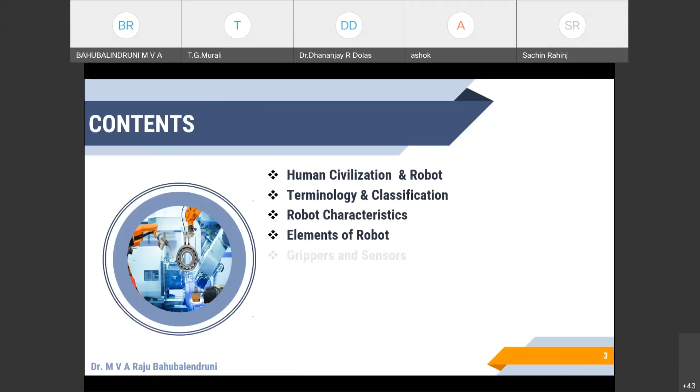The contents are planned like human civilization and the robot, the terminology and classification of robot, robot characteristics, elements of robot, the grippers and sensors used for the robot, selection of robot, accidents and safety of robots, applications of industrial robot, and installation checklist. Finally, the future of industrial robots.

So, human civilization and robot. If you see the size of the brain, which started increasing rapidly during human evolution, the scientists say that the increase in brain size allowed the development of complex tools and innovations for mankind. You can see here the picture of how the brain size increased from 650 cubic centimeters to 1350 cubic centimeters.

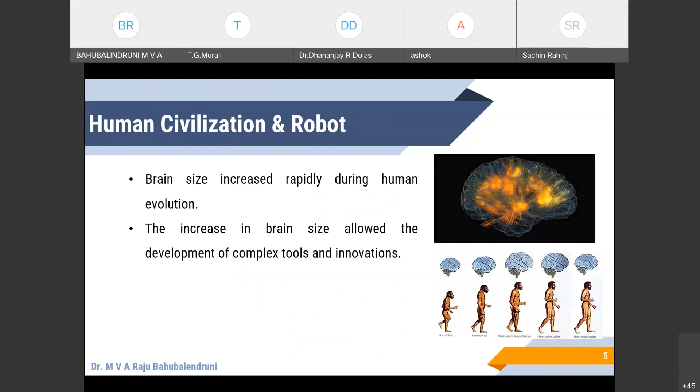If you trace back the Stone Age, initially mankind was using stones as tools for food. From 3 million BC to 1.9 million BC, humans lived as hunter-gatherers. They were dependent on hunting large prey and then medium prey with tools, and mostly stone-based tools were used to hunt animals. The brain size grew from 650 cc to 1500 cubic centimeters. This evolvement is a very slow phase, considering from 3 million to 0.3 million BC.

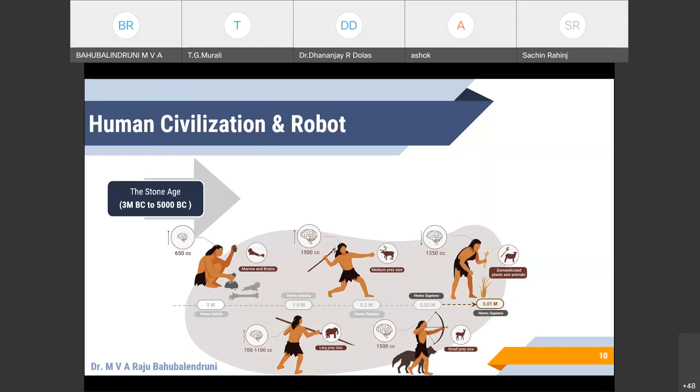Till 12,000 BC, humans mostly lived as hunter-gatherers, and then cultivation started in the year 12,000 BC. By the end of the Stone Age, around 5000 BC, humans started thinking of tools which support cultivation.

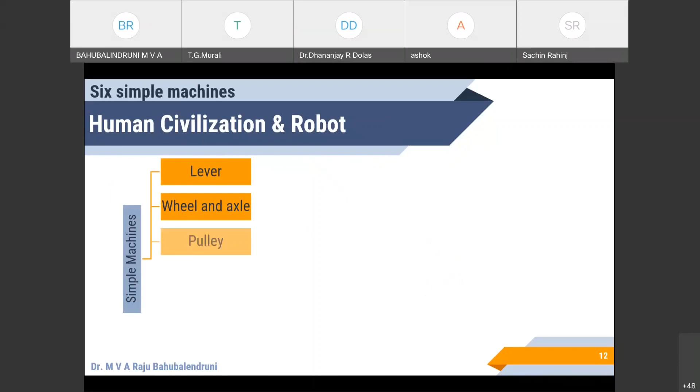So certain tools evolved as 6 simple machines in the early stages of the Bronze Age or the late stages of the Stone Age. These 6 simple machines are still part of our life: the first is the lever, the second is wheel and axle, third is the pulley, fourth is the inclined plane, fifth is the wedge, and sixth is the screw. Most of these simple machines were used for agricultural purposes.

The lever is a simple machine made up of a rigid beam and fulcrum, which you can use to lift heavier loads with smaller effort. You can see these kinds of mechanisms, the principle involved in most of our day-to-day elements.

The next thing is the wheel and axle. Here there are two cylinders, one with a larger radius, another with a smaller radius. Typically the smaller radius cylinder we call a shaft, and the bigger radius cylinder we call a wheel. So you can transfer the load from the bigger wheel to the smaller wheel or the smaller wheel to the bigger wheel.

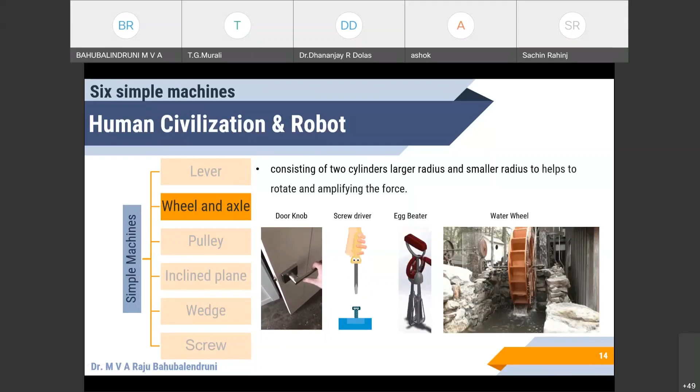This kind of mechanism was initially used for agricultural purposes, to lift water for cultivation. The third thing is the pulley—a wheel on an axle or shaft to support the movement and change of direction of a taut cable or belt. Typically the pulley transfers power to the belt, which is further connected to another pulley. This is called the block and tackle mechanism, which you can see in ports while picking up heavier loads and placing them, like the heavier containers in ship harbors with cranes. This block and tackle mechanism is basically based on the pulley system, where with small effort you can lift heavier loads.

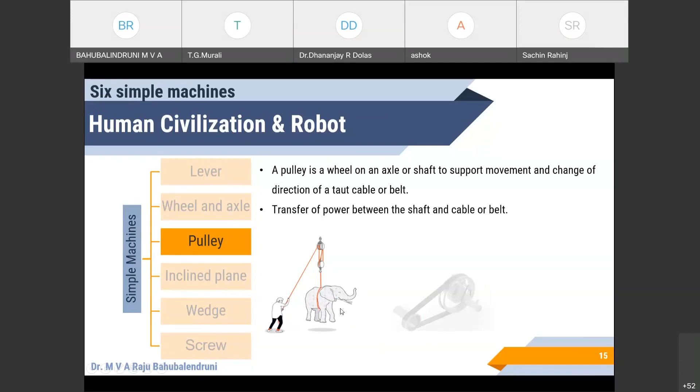The fourth one is the inclined plane, which is typically used to lift heavier objects to heights or move them down, and vice versa.

The next one is the wedge, which is mostly used to cut plants or trees—you can see that in the axe. It can change the direction of the force into other perpendicular directions.

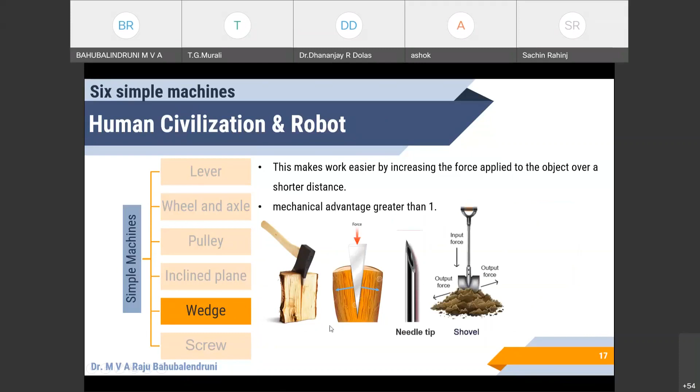So the final one is the screw mechanism. You might have heard of Archimedes' screw principle, which can transfer motion from rotational to linear, initially used for lifting water for agricultural purposes. These six are the simple machines generally.

Some of you might have seen or read this during your engineering mechanics studies. These six simple machines evolved during the late stage of the Stone Age or the earlier stages of the Bronze Age.

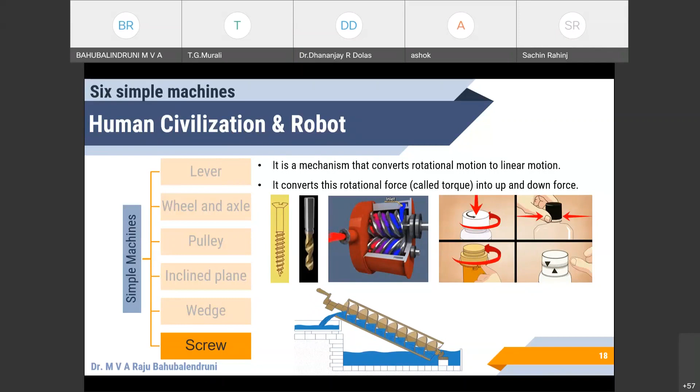But still, we are using these six simple machines with their mechanisms. And now we have come to Industrial Revolution 4, where there is a huge and rapid change in machinery and equipment for better manufacturing and higher productivity of complex goods and products.

If you look at a machine, generally we create or fabricate a machine for a specific purpose, which can do only a single task. You cannot train a machine for a different task, and the degrees of freedom of a machine are completely constrained and it cannot think on its own.

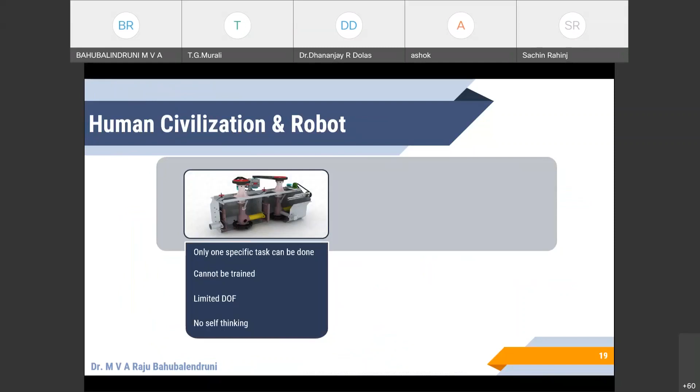So humans have come up with multi-tasking machines which are capable of doing multiple tasks with higher degrees of freedom. That's what we are calling robots nowadays.

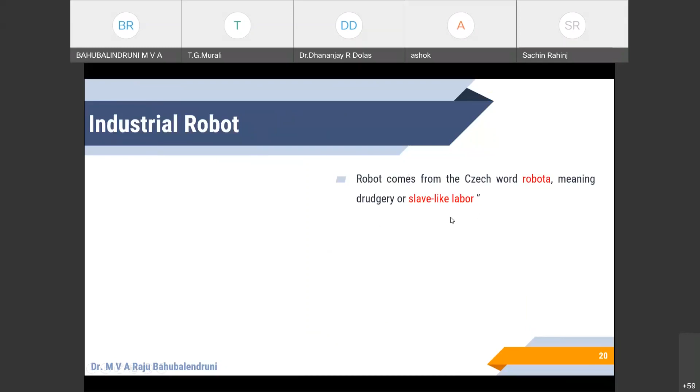The word robot is evolved from the Czech word robota. Robota means a slave-like laborer in Czech. So the basic definition of robot is from the Robot Institute of America.

A robot is a reprogrammable and multifunctional manipulator which is designed to move material, parts, tools, or specialized devices through variable programmed motions for the performance of a variety of tasks.

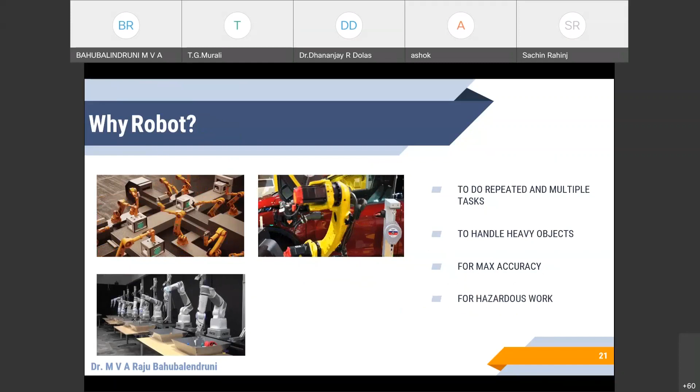So we generally use robots to do repetitive tasks, handle heavier objects, attain maximum accuracy in manufacturing, and work in hazardous environments.

These four are typically the limitations of humans, what we cannot do. If we do repetitive tasks, we tend to get fatigued, or our musculoskeletal system doesn't allow us to do it repeatedly. Ergonomics plays a significant role here, which can be avoided by replacing with a robot.

And of course, with heavier objects, the accuracy of the robot is obviously high with appropriate control systems associated with the robot.

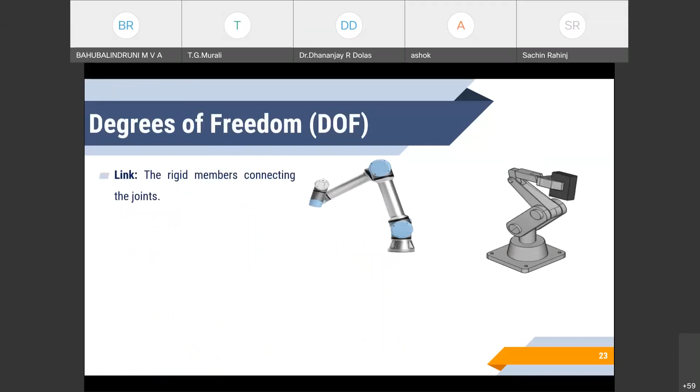Now let us look into some terminology that we use with robots. Here you can see the animation where we can find links and joints with a defined motion. The link is a rigid member connecting to the joints, where the joints are the movable components of the robot that can cause relative motion between the links.

So we are going to supply some power at the joint. The joint will give the motion to the link associated with it. Based on the number of joints, we define the degree of freedom of a robot.

This is nothing but the number of independent movements the robot can exhibit in three-dimensional space. The more degrees of freedom a robot has, the more flexible it becomes to do a specific task.

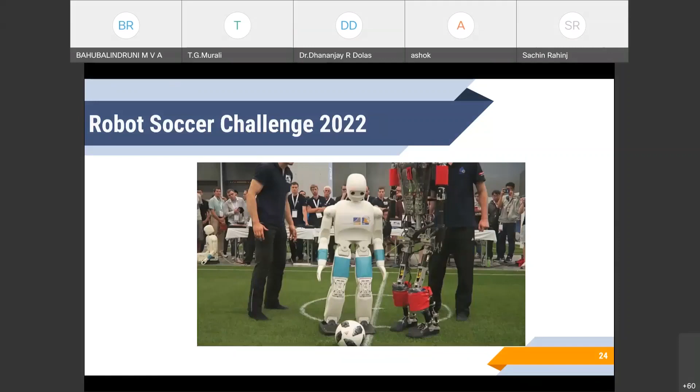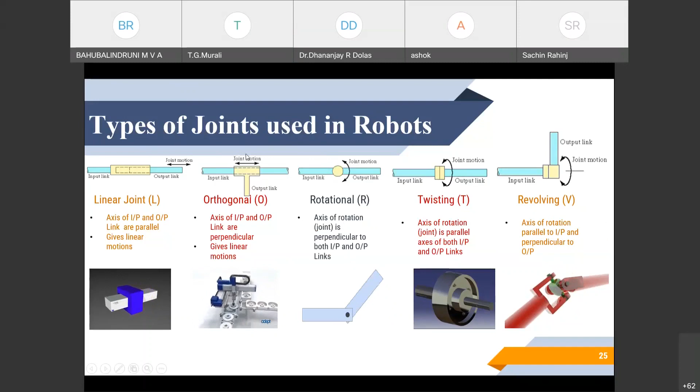Now let us try to classify the robots. There are multiple types of classification based on certain parameters. So now we are classifying based on the space that a robot can move. The first one is Cartesian, the second is cylindrical, the third is polar, the fourth is angular, and the fifth is SCARA.

The Cartesian robot mostly moves along the XYZ axis, so typically the workspace would be a rectangular cuboid. This can be achieved by means of LOO, which means a linear joint vertically and an orthogonal joint perpendicular to the linear joint, and another orthogonal joint to the second link. With this LOO configuration, we can achieve a rectangular cuboid space, which we call a Cartesian robot. It can also be called a gantry robot.

Mostly you can find these for pick and place applications. Even in 3D printing, the FDM machine works on similar principles. So these gantry robots use this Cartesian configuration.

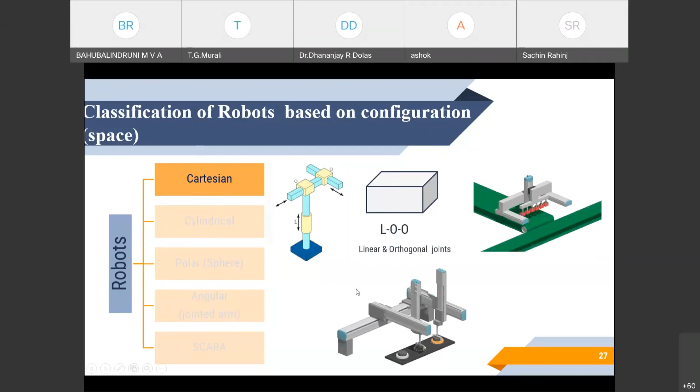The next is the cylindrical configuration, in which we use TLO. T for the twisting over the base on its axis, L for the linear, which slides over the vertical axis, and perpendicular to this link is the orthogonal joint, with which we can get a cylindrical space.

And the next is the polar or spherical robot, in which the type of joints are TRL. T for twisting over the axis of the base, and then rotation, which is perpendicular to the twisting axis, and there is sliding in the other direction, that is the linear joint. With the twisting, the rotation, and the linear joints, we can form a polar robot.

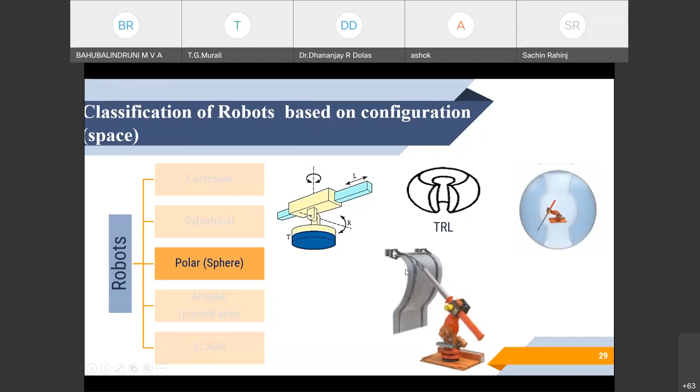The polar robot's space is typically in a spherical shape, which we use for movement along a contour. The contour is supposed to be of the highest second degree order, so you can use it for cylindrical applications. You can use it for welding applications as shown here.

And the final is the SCARA robot, which is specifically designed for assembly operations. SCARA stands for Selective Compliance Assembly Robotic Arm, which generally does simple insertions, the peg and hole assembly operations, which can be done by these SCARA robots.

The SCARA robot has a TTL configuration, where two twisting joints move within the space, and L is the linear one to pick or place the object. So this is the classification of robots based on space.

The next classification we can do is based on mobility. Most industrial applications use fixed robots, meaning the base is fixed, while the other arms move to reach the respective locations. The second classification is moving robots, where the movement can be given by legs or by wheels.

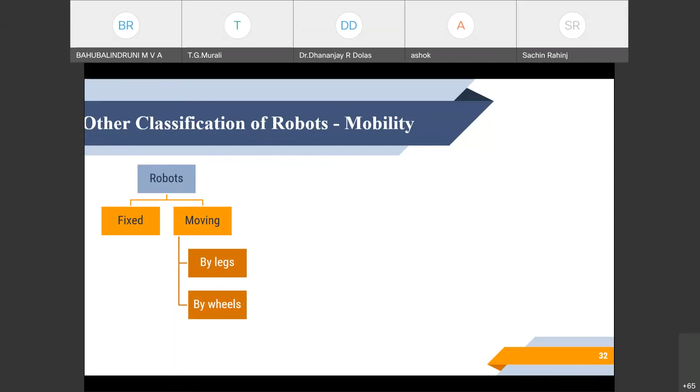In the moving robots, you can see here an example taken from Boston Dynamics, the Big Dog. Nowadays it is also used for manufacturing applications, specifically in material handling and palletizing.

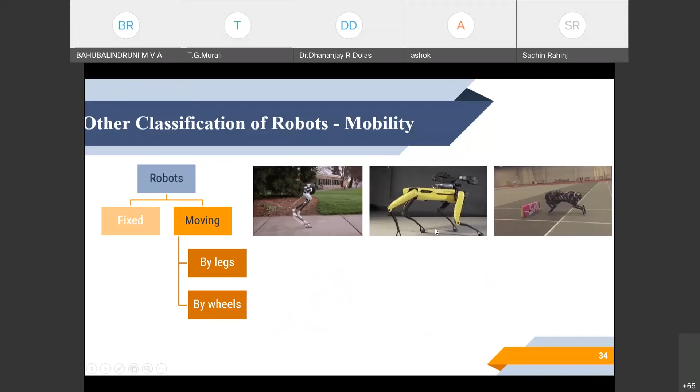The wheeled robots are used mostly for surveillance and inspection purposes.

The third categorization of robots is based on the control system. The first is the point-to-point control system, where you do not have control over the path of how it moves from the start point to the end point. The second is the continuous path control.

Here you can define the path of the robot, so the robot will move along that specific path using interpolated points along the curve. It can be a straight line or any second or higher order curve.

The third one is the intelligent controller. Here you are not just stating the start point and end point, you can also define the environment, meaning the obstacles present in it. The controller has an artificial intelligence system that can derive a collision-free path which avoids the obstacles and moves from the given start point to the end point.

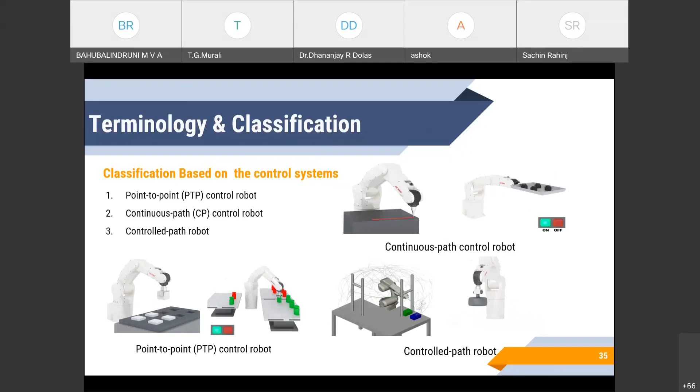Now we are moving to the characteristics of the robot. These characteristics will further be used while buying or selecting a robot for a specific application.

The first characteristic of a robot is the payload. The payload tells the ability of the robot, how heavy an object it can lift.

The next is repeatability, which is the ability to position back to a certain point. When you do repeated tasks, repeatability is the major concern.

The third thing is accuracy. When you do precision manufacturing, accuracy plays a significant role. This is the capability to position the tool at a targeted point in the work volume.

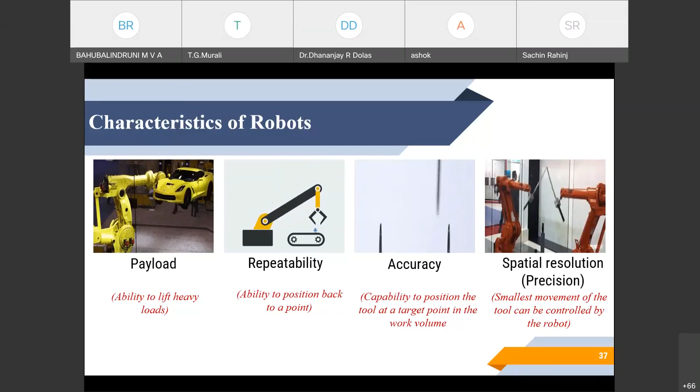The fourth one is spatial resolution, the smallest movement of the tool that can be controlled by the robot. Each robot is fitted with certain end effectors, which we will cover in the forthcoming slides — these can be grippers or tools. So spatial resolution is the smallest controllable movement of the tool, describing how precise the movement is.

Now let us look into the elements of the robot. The first one is the power supply, which is the obvious requirement when you install any robot.

The second one is the controller. As we discussed the categorization of the robot based on the controller, we need the controller for a specific movement of the robot.

Then the end effectors — the name itself shows it. We are going to attach this at the end of the robot arm. So an end effector can be a gripper or a tool.

The fourth one is the actuators, which act as the power supplier. It can be a mechanical, pneumatic, or hydraulic power source used to actuate the links. We need actuation for both the robotic links and the end effector, so we have to ensure compatibility between the power source for the actuators and the end effector.

The fifth one is the arm or manipulator, which is the skeleton of the robot — the base, links, and joints. The sixth one is the drive mechanism. We have a specific session on these drive mechanisms, which are typically located at the joints to provide motion to the links. These are the main elements of the robot.

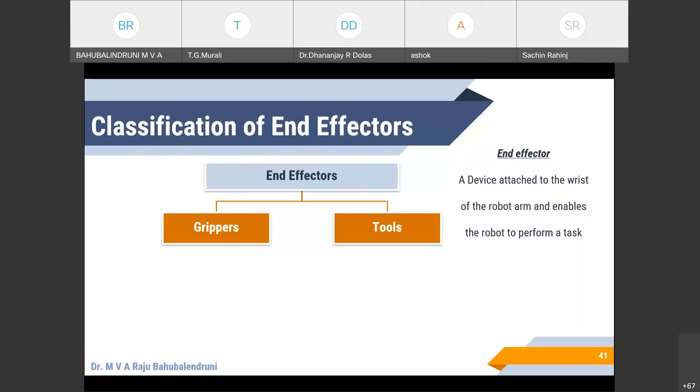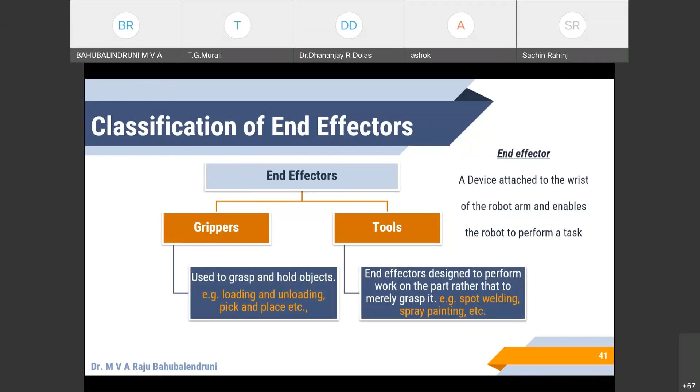The grippers are generally used to grasp an object and hold the object, typically used for loading and unloading and pick and place. The other type of end effectors are the tools. These tools basically change based on the specific application of the robot. For spot welding, painting, arc welding, or inspection, we will be using different types of tools.

The next one is the vacuum based grasping. Vacuum based end effectors are mostly used in industrial applications because they are so precise. The vacuum cups, or suction cups, are made up of elastic materials such as rubber or plastic. It works based on the difference between atmospheric pressure and negative pressure. Based on the weight of the object, the surface area of the suction cup can be enhanced. So pressure multiplied by area would be the total weight of the object we are going to lift.

These vacuum cups or suction grippers cannot be used for parts with holes, because we cannot create the suction. Also, at irregular surfaces, we cannot use the vacuum cups. So that is the biggest limitation with these vacuum grippers.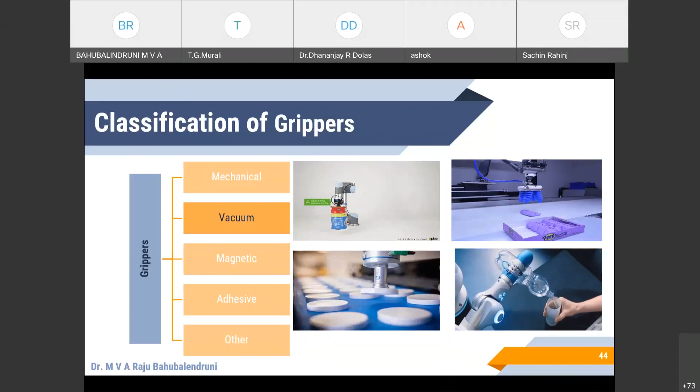The next one is the magnetic grippers. Here we have two types: one is a permanent magnet gripper, another is based on electromagnetic grippers. Both these magnet grippers are used to hold metallic parts, typically the ferrous parts. The magnet grippers are so precise at their function. So here you can watch the video.

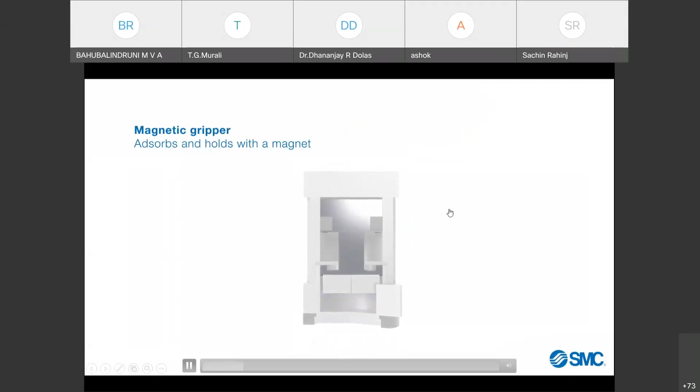Here you can see this is an electromagnetic gripper. The air is pumped, entering either at the top or the bottom so that it can load and hold the object. You can see suction grippers cannot be used when there are pores or holes. Even mechanical grippers don't work well in such cases, where you can use these magnetic grippers instead. So this is an electromagnetic gripper.

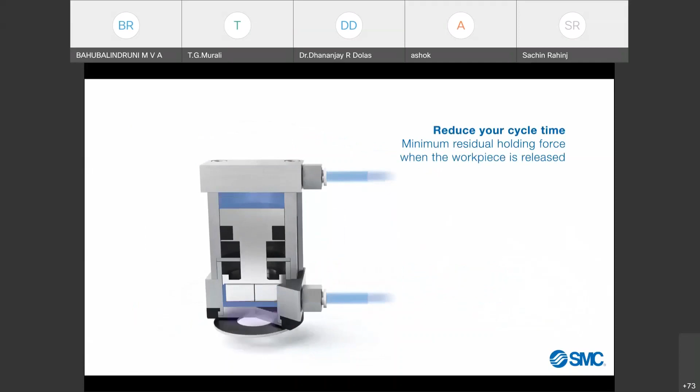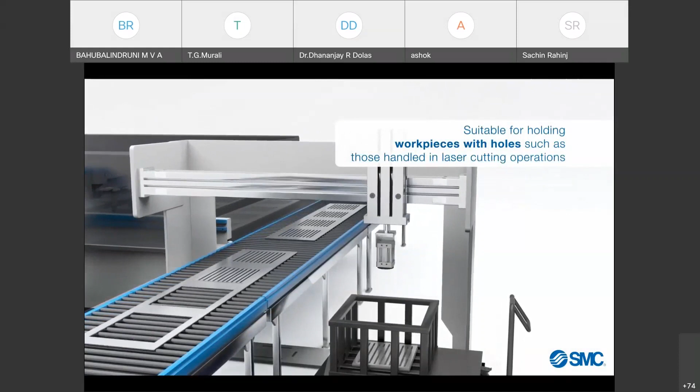You can see this used for a pick and place operation. This is typically for a precise pick and place application, where we can use this magnetic gripper.

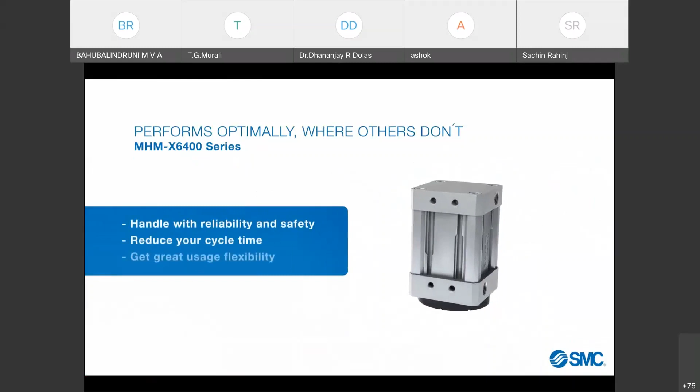Now we will see the other type, that is the adhesive grippers. In the adhesive grippers, the adhesion is given by means of some tacky material. Since it uses tackiness, these adhesive grippers cannot be used for multiple instances. The adhesive based gripper will stick to the object, lift it, and then release it. The adhesive grippers are not very much used in industrial applications.

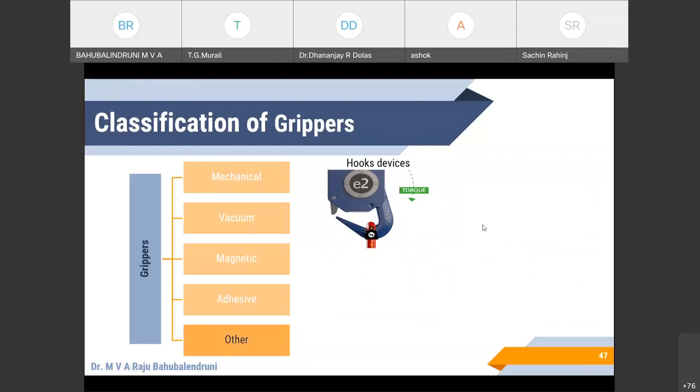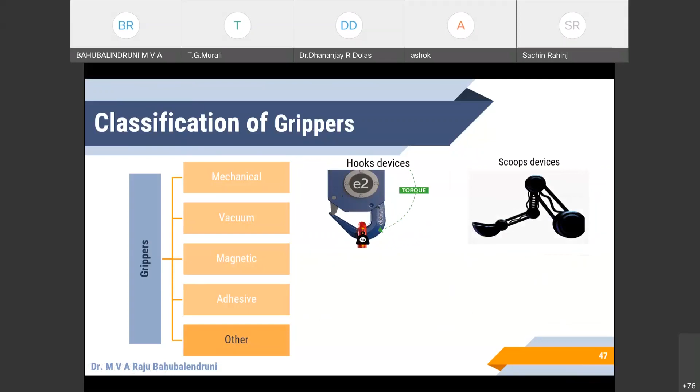The other types of grippers include hook kind of devices and scoop kind of devices. These scoop kind of devices are generally used to take powdered material or material in granular form. You can also use this scoop kind of device even for liquids, such as molten metals.

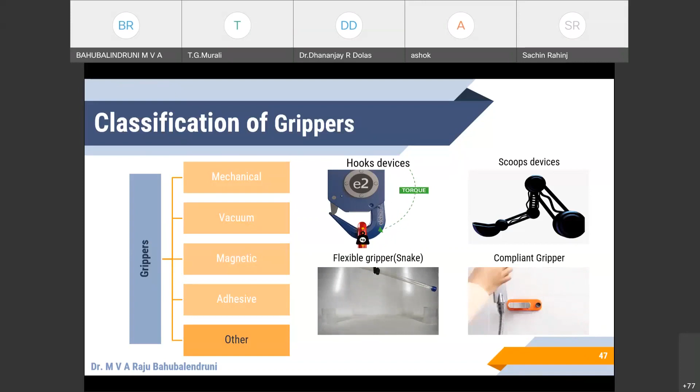There are also some flexible grippers and compliant grippers. The compliant links themselves are a separate subject. We will see in human robot collaboration how these compliant links are much better and useful for industrial robots. So these are certain other categories of the grippers.

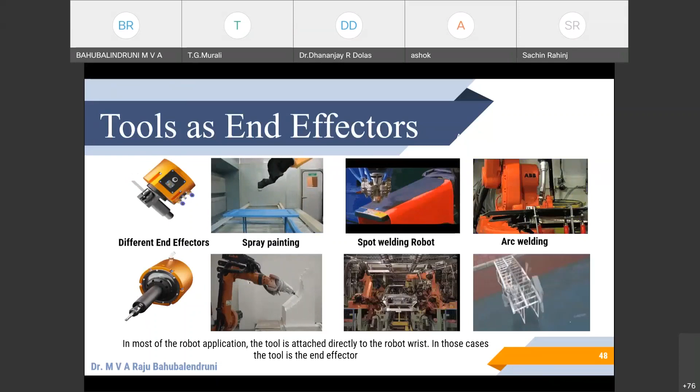Now let us look at the tools. Basically, we use the tools based on the application where we are going to use the robot, maybe for drilling purpose, inspection purpose, painting purpose, welding such as arc welding or spot welding, or for the assembly purpose. The tools will vary accordingly.

Whenever you have an end effector, you have to fix it to the robot exactly at the wrist. There you have a face plate, and to the face plate you are going to fix the end effector.

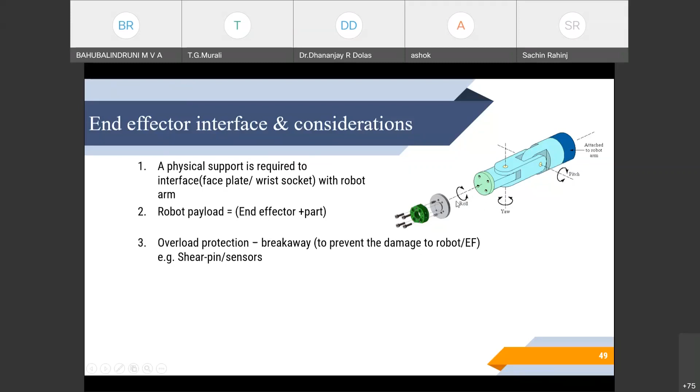Whenever you use a robot, we clearly notify the payload of the robot. We always ensure that the weight of the end effector plus the weight of the component it's going to handle together should be considered for the robot payload. If any damage occurs to the robot, that costs very high, so we place shear pins or sensors which can find out the weight of the gripper and the part together, and then disjoint from the robot so there will not be any damage.

Whenever you are fixing an end effector to a robot, we must also ensure the kind of actuation or power source for the end effector to perform the task efficiently, because the robot will give its own movement, and in coordination with that movement, the power source should also actuate the end effector to complete the task efficiently.

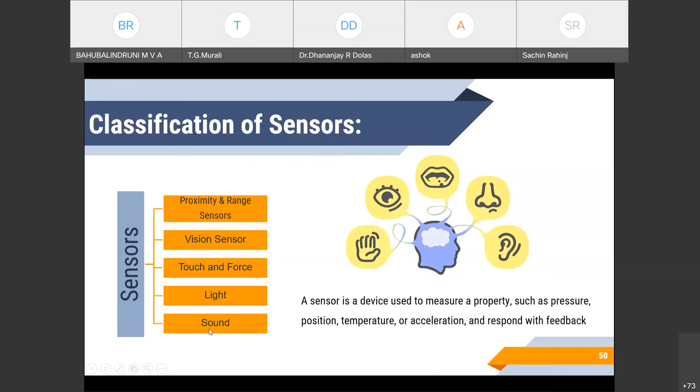In addition to grippers and tools, we also have sensors. A sensor is a device used to measure a property such as pressure, position, temperature, acceleration, and also to respond to the manufacturing or surrounding environment and give feedback. Here we have 5 types of sensors: proximity and range sensors, vision sensors, touch and force sensors, and light and sound sensors. We also have electrical or thermal sensors, but we are not going to discuss those.

The next type is vision sensors. A vision sensor is not just a simple camera; there will be a calibrated system along with the camera, and a lighting system so it can work in a dark environment also. These vision sensors are typically used for identifying and detecting objects.

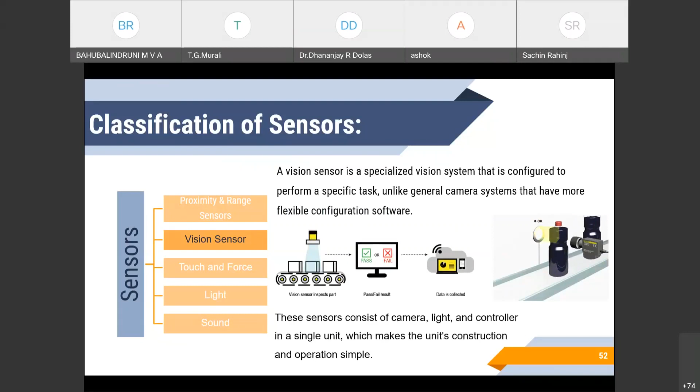The next is tactile sensors. Under tactile sensors, we have touch sensors and force sensors. Touch sensors we mostly see in day-to-day life, in our mobiles. When you give your thumb impression, only then it can get locked or unlocked, and even in biometric attendance as such, it recognizes our touch and gives the response. Piezoelectric materials are used to sense the touch and then respond in terms of electrical signals.

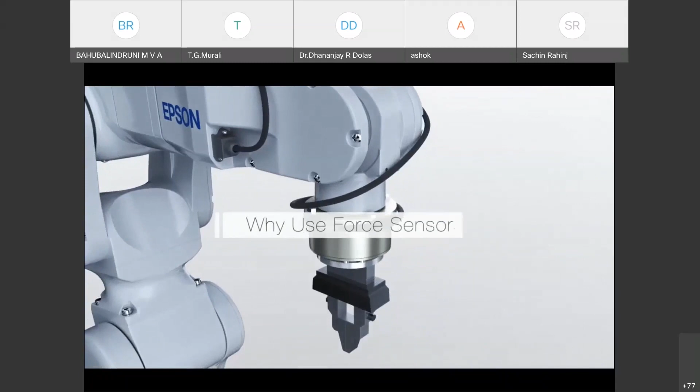The force sensors, you can see in this video, are able to detect and give feedback in all 3 forces and 3 rotations, the moments: Fx, Fy, Fz, and Mx, My, Mz. This force sensor can be used for contact, alignment, probing, following, and pressing. Mostly we use a combination of these for assembling and manufacturing. This demo shows how the force sensor can be used for each independent task, and how it can also be used for a collaborative task for a specific manufacturing application.

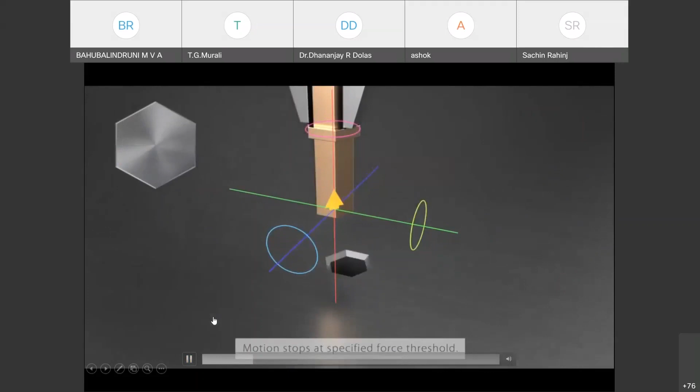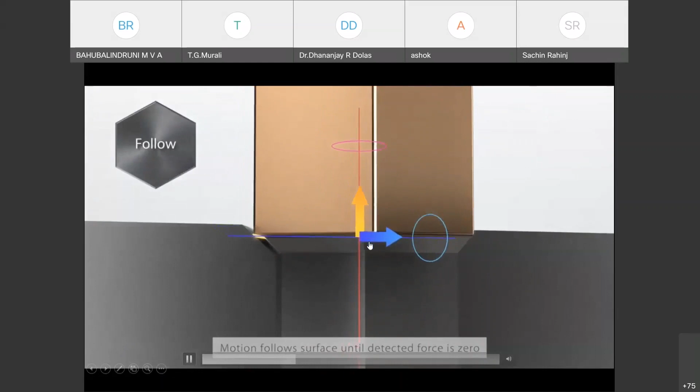This is an example for contacting. Based on the contact, it senses the force, and misalignment can also be detected, and accordingly it gives the forces. You can see the force, how much force is required; the blue and red arrows show this. Along X and Y, you can see how much force is supposed to be given so that it will slide. Now only in the Z direction is the moment; you can see this Z direction force for the alignment.

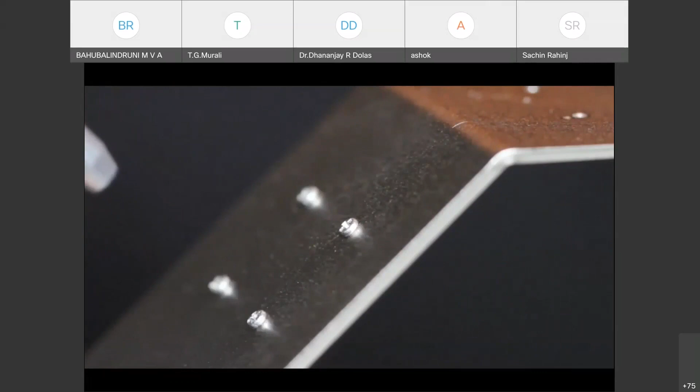Here is a combination of contact, follow, and press for the screwing, and we can also use it for riveting and unscrewing. For the alignment purpose, we need contact, follow, and then align.

You can see the change of forces in X, Y, Z directions and the moments when it is aligning.

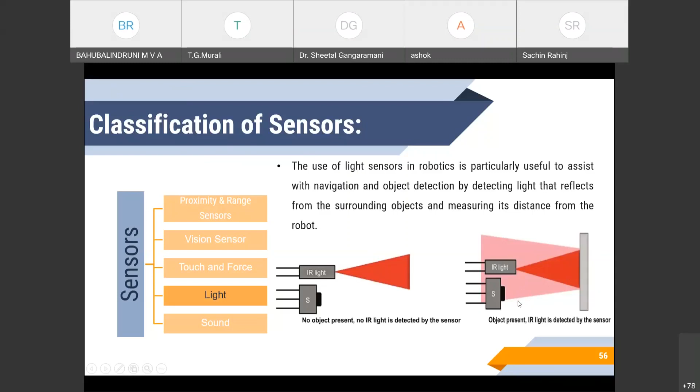So the next is the light sensor. In the light sensor, we have an IR light emitter and a detector. The detector is typically a photoresistor which can detect the light that reflects from the object. In presence of no object, the light only emits from the IR light emitter and it just goes. If there is an obstacle or an object, then the light can be reflected, which would be sensed by a

photoresistor, which is used to identify the object. Similar to the concept of the light sensor, the sound sensor also works. Here you can take the best example of our ear, how it works. It has a diaphragm with magnets that are twisted with the metal wire. When the sound signals hit the diaphragm, it vibrates and current can be stimulated from the coil. So you can see...

So now I am not covering the concept of thermal and electrical sensors. We have a specific session on intelligent sensors and sensor fusion for the industrial robot, maybe tomorrow. If you have any further queries on sensors, you can explore more in that session.

Now I'm taking you through the robot selection. When we are going to select the robot, the parameters to be considered: the first is the degrees of freedom. This will tell you the reachability of a specific location, and the power supply which we are going to give to the robot and also to the end effector.

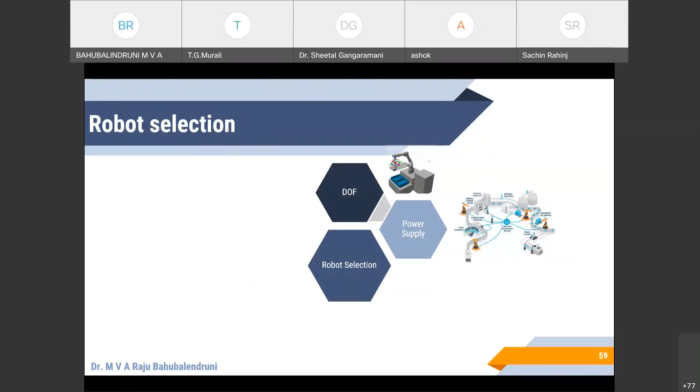If we are going to take the robot for material handling, for welding, or for spray painting, whatever end effector that we are going to assemble to the robot, for that also we have to check the power sources. Then the control system, maybe the continuous path control or any other intelligent controllers in which you can write your own program.

And then the maximum payload of the robot and the reachability of the robot within the working environment, and the application where we are going to use the robot.

Then comes accidents and safety. In general, under normal working conditions, we generally do not find any accidents with the robots. Most robot accidents occur only during the programming stage, programming and testing stage, or the maintenance stage, while repairing, testing, or adjustment.

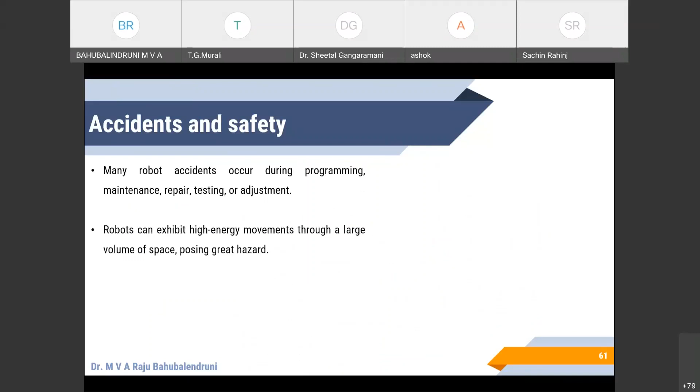Typically the links are so rigid and they weigh a very high payload, so there will be high energy movements in the workplace, which can create a significant impact or hazard if the human stands inside the work volume of the robot. That's the very basic reason the robot is completely and clearly isolated or separated from the human working environment with a fencing.

So now in Industry 3.0, the robots are working within the fencing, and in Industry 4.0, we are moving towards fenceless robots with fenceless cooperative robots which can work in collaboration with humans.

The type of accidents can be an impact or a collision. This is a testing of the effect of the impact or collision if the robot hits a human within its environment.

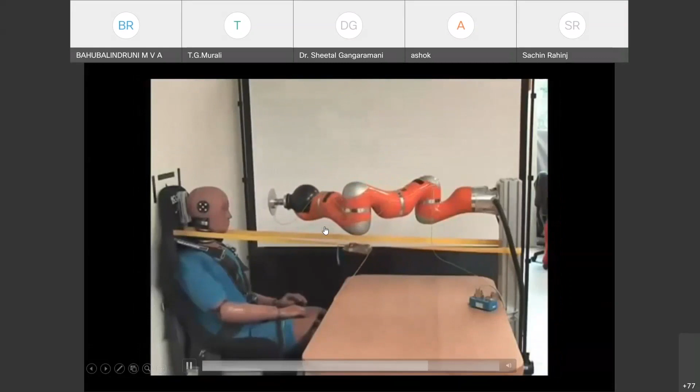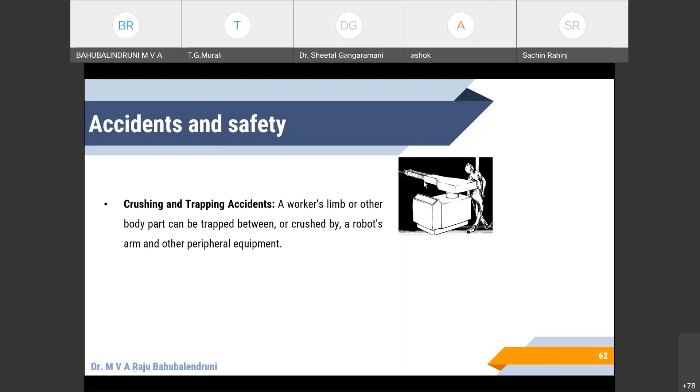The other one is crushing and trapping accidents. If any part of the human body, like the limb or any other body part, is trapped or crushed inside the robotic peripheral equipment or arms, one must take care. For this purpose, you will have switches, or you can follow the robot-off-man-on or man-off-robot-on conditions, so that you can avoid these kinds of accidents.

And the third one is mechanical parts accidents. These generally happen due to breakdown, release, or failure of parts. If we do not do the appropriate maintenance frequently, these mechanical part accidents typically occur.

We have a special session even for accidents and safety by an expert from the industrial safety background. Here you can visualize certain failures of the machine during the running condition, because a heavy payload is there. So a sudden failure can be found at this particular joint, it could not hold the entire weight.

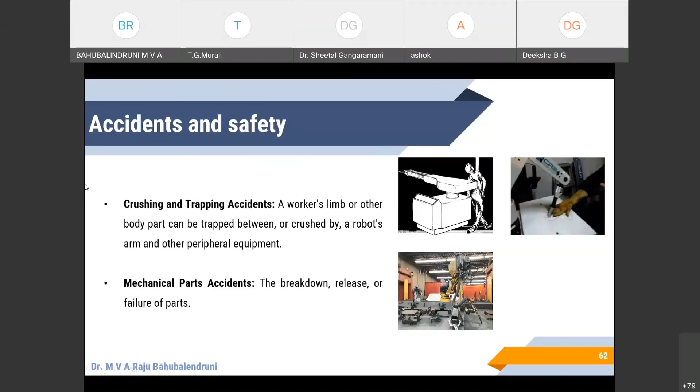So the source of the hazards can be human errors or improper controlling, unauthorized access to the robot, mechanical failure of the equipment, surrounding environmental sources, and improper installation or improper calibration of the robots.

Now we reach the application of the industrial robot. The robot can be used in multiple industrial applications, which includes inspection, assembly, and cleaning. Typically, you find cleaning in case of the energy sector and electronics sector. You need a clean room when you work with nanotechnology, so you have clean room robots.

And gluing means when you use adhesives to create laminates. When you do composite laminate manufacturing for an aircraft industry, you are going to use robots for gluing, applying a uniform thickness of glue to the laminas.

And then water jet cutting, where precision is very important, and it is also so hazardous for a human to work within that environment.

And painting - sometimes the paints are so toxic in nature that humans are not supposed to inhale them. So robot painting is one of the very common things you can see in aircraft industries. If you want to paint such big equipment or machines, it cannot be done by humans. So mostly robots are used for painting aircrafts and automotive transportation vehicles, where you can get a uniform layer thickness with high precision.

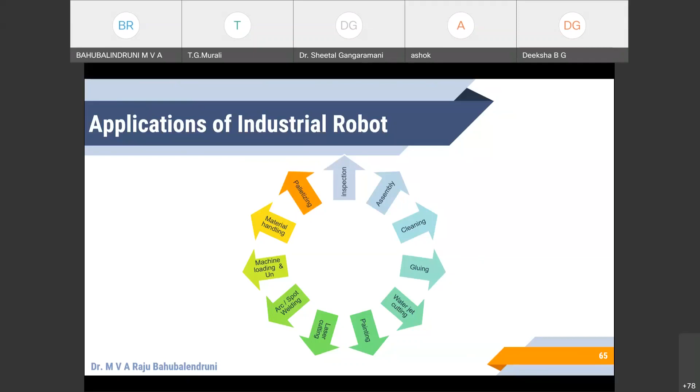And then palletizing. The robots are mostly the highest used in welding, then machine loading, unloading, and material handling, and then assembly. These three are the highest stake - you can consider almost 70% of industrial robots are used for only these three applications.

Now we come to the final one, the installation checklist. If we want to buy a robot and install it, the first thing to consider is the utilities in the cell where you are going to place this robot. The utilities typically come as the space needed to keep the robot, and what will be the power source, whether it is electrical, pneumatic, or hydraulic, and what kind of transmission you are using.

The second thing is the placement of the robot. An industrial robot generally works with the coordination of many other equipments and conveyors, production machines, fixtures, and tools. So where exactly you are supposed to place the robot so that the material transfer from the robot to the other parts of the machinery is optimized - based on that, we decide the placement of the robot.

And then the next thing is the other supporting units like material handling, and the base part mounting for the assembly, the base part mount assembly and welding, the base part mounting units, and the conveyors to move parts inside the cell and outside the cell. Once the robot completes the task, a human cannot enter inside the cell, so the parts will be sent through the conveyor to outside the cell.

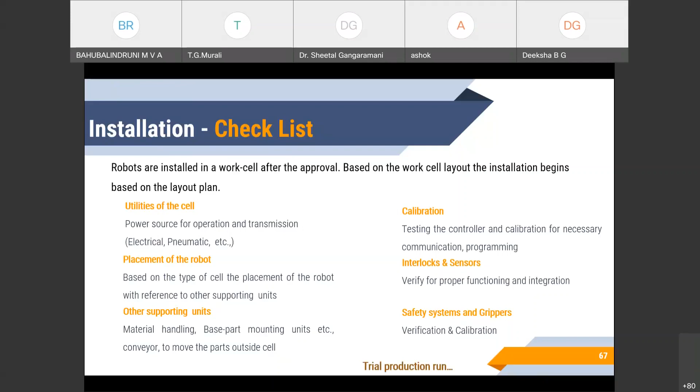So with this, we will verify and calibrate the entire robotic work cell. Instead of just a robot, I can say it's a complete calibration of the robotic work cell. Once we do this, we can go for a trial production run. If the trial production run is fine, then we can go for real-time production. So this would be the installation checklist for an industrial robot.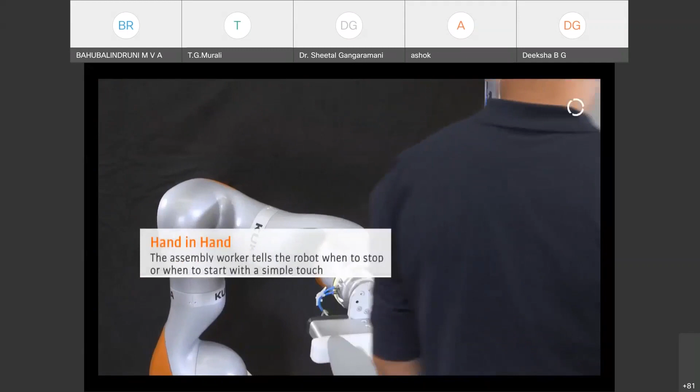When it comes to future industrial robots, you can look at this collaborative robot by Kuka Robotics, where the human and robot have to work together to do a task. Humans may not be able to do the task with high precision, so we need the robots. But when the robot is moving, it should not harm the human. So the human and robot together are working in collaboration.

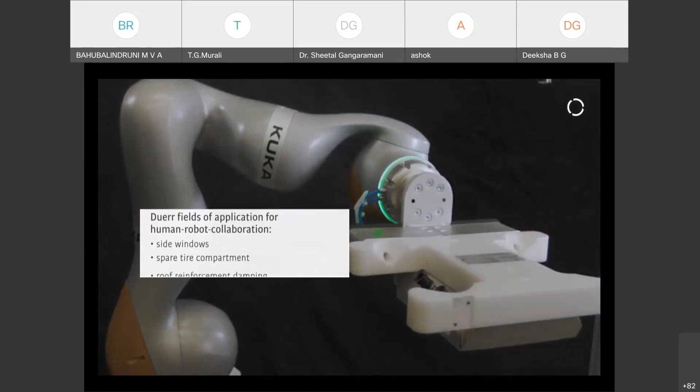So these are certain applications of human robot collaborations in the automotive industry.

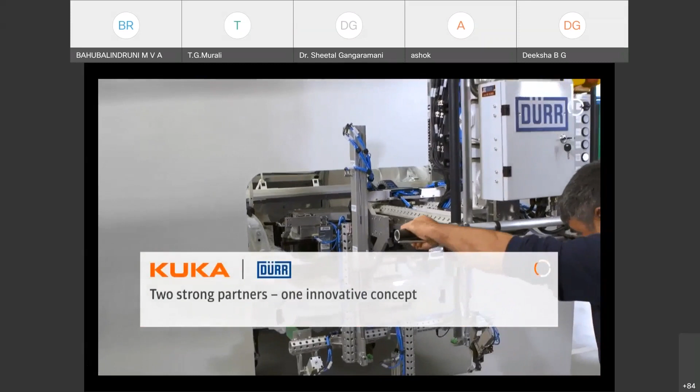So you have seen the collaboration between human and robot to do a specific task. Still, we have to achieve a lot in the collaboration. So that we are going to see in tomorrow's session - the different types of human robot collaboration, why it is needed, and what are the existing technologies, challenges and future scope in human robot collaboration.

We are going to see one more short video. This is from ABB Cobots.

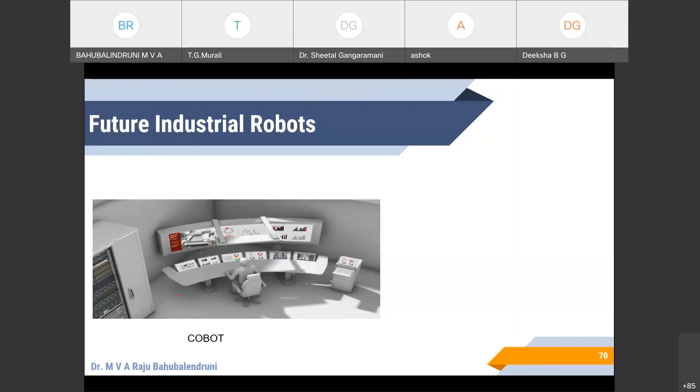You can see the machine flow line. The reason here, when you use the cobots, the workspace is so much more reconfigurable, and it is so flexible. And day to day, we are coming up with new methodologies, new manufacturing processes, new products.

You can see if a person enters inside the grid, when a person enters the robot's sphere, immediately there is a red kind of sensor and it stops working. Here you can see the green, which indicates that the robot is in working condition. As I told you previously, the robots are given fences. Now the fences are removed, and there are sensors to identify the presence of the human and to interrupt the process of the robot so that it will not harm the human.

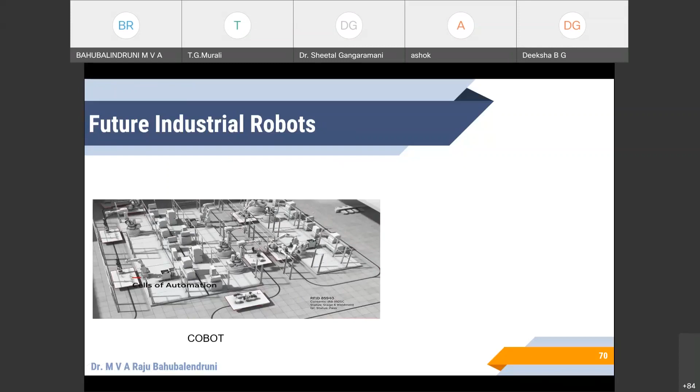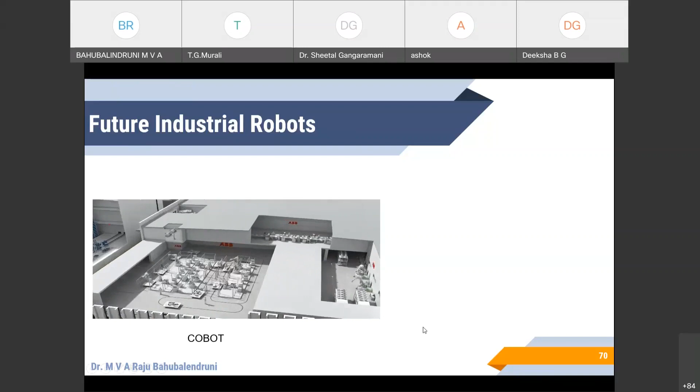So finally we are going to see one more video on a self-balanced robot by Boston Dynamics. Most of you might have seen this Boston Dynamics robot before, which is capable of going in multiple terrains, and here it is used for material handling with the highest load carrying capacity. So it can hold up to 20 kgs, I think.

So we can expect a lot and a lot in the industrial robot segments, with a multi-dimensional scope for expansion in terms of sensors, controllers, optimizing things, and collaborations. So with this, I'm concluding my session. There is a lot of future scope for industrial robots, and the upcoming sessions are dedicated mostly to advanced topics. So thanks for listening. If you have any queries, you can ask, please.